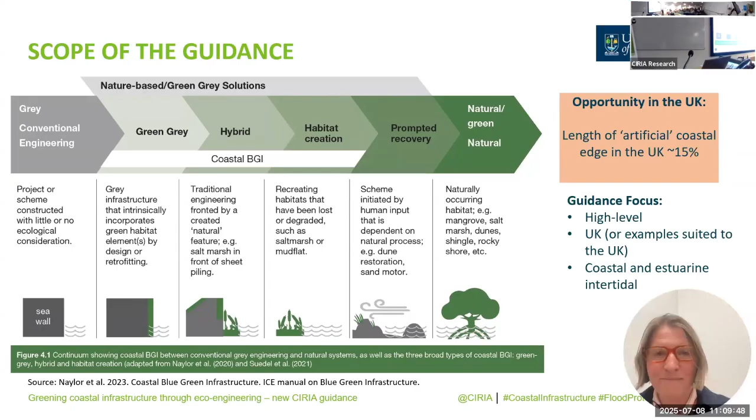Thank you very much, Larissa, for providing that and pre-recording it in time for the session. So I believe we're now going to hear from our next speaker, Joanne Herridge, who's an Assistant Project Manager at HR Wallingford and lead author of the guide, alongside Emma Hicks, the Principal Engineer at Haskoning, who are going to be giving us a deep dive into the guide and what you can expect to learn from it as well. So if I could invite Jo to the stage.

Yeah, so hi, I'm Jo Herridge from HR Wallingford, and myself and Emma are just going to take you through some of the main topics that are included in the guidance and just give you a bit of a flavour about what's included.

Okay, is there a microphone? There is. I can up the microphone max, so just... Okay. You might just have to speak into it. Yeah. Okay.

So just to introduce you to the project team, the author team is made up of HR Wallingford, we were the lead authors, and we're working with Haskoning and Hades, who authored some of the individual chapters. And we're also supported by independent consultants, Steve Challoner and Larissa Naylor, who you already met. And we had a project steering group that was co-chaired by Larissa and Brian Curtis, and it was made up of all these organisations that you see listed here. So thanks to everyone there who's involved in the reviews and comments throughout the process.

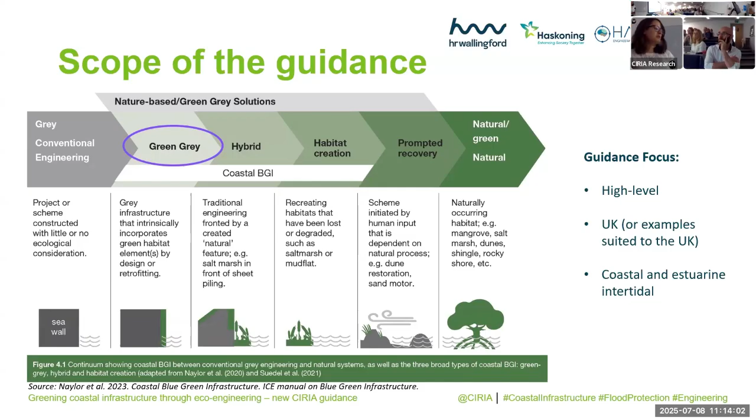So why is now a good time for the guidance? Well, over the last 10 years, there's been a rapid advancement in the science, policy and product development related to eco-engineering. So we have a growing body of academic and industry trials and evidence of applications and their success to build on. But at the moment, it's not particularly widespread in industry. It's led often by these enthusiastic and dedicated teams or individual champions. But it'd be nice to bring it to a more widespread application and seen as a viable first option rather than just a nice to have.

And there is lots of guidance out there already about nature-based solutions. But as we said before, green-grey is recommended in place of grey engineering solutions where other nature-based solutions are not suitable, and also where it's ecologically appropriate. So these are some of the main project goals. We wanted to build upon existing guidance documents, such as CIRIA and NERC's collaboration in 2017, and update the examples given there to really highlight the art of the possible when it comes to coastal eco-engineering. And to do that, we look at the evidence, the design and the application of the methods, and use that to provide recommendations of how these designs can be applied in typical UK coastal settings.

We also wanted to look at some of the asset factors, so things like the asset lifecycle, monitoring and maintenance, and also the business case, so looking at how to build an effective business case, and also looking at some of the costs and benefits and policy considerations there. And one of the key things we wanted to do was inspire the target audience. So that could be asset owners, engineers, coastal ecologists, or any other stakeholders involved in the design, construction and management of coastal infrastructure, and give them ideas about how eco-engineering could potentially be applied in their fields or in their projects.

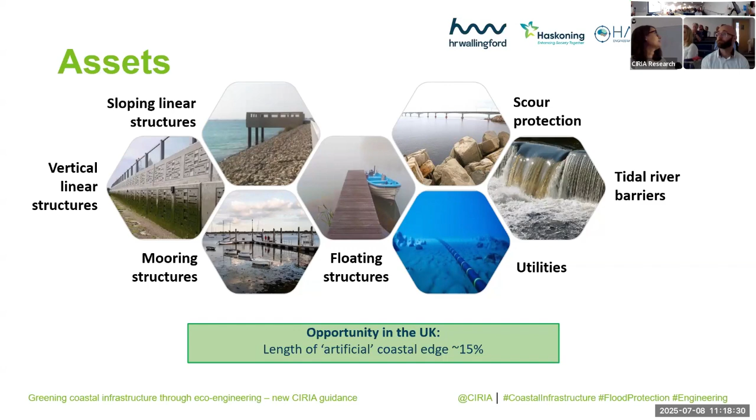And when thinking about the assets, you need to consider the asset lifecycle. So there's a simplified version of that shown here. And we see that you can include eco-engineering features really at any stage within that lifecycle, depending on the project. So if it's a new construction, you probably want to consider it during the early stages, during the scoping, planning and design phases. But there's also techniques that could be retrofitted onto structures.

And these could obviously be applied on existing structures, so it could occur anywhere in that lifecycle. And there's also opportunities within the regular repair and maintenance cycle of an asset. That could be an opportunity also to introduce eco-engineering. And throughout this, you need to consider the asset performance factors. Obviously, you want the eco-engineering features to perform from an ecological perspective, but also bearing in mind the intended engineering performance of the asset and make sure that's not affected.

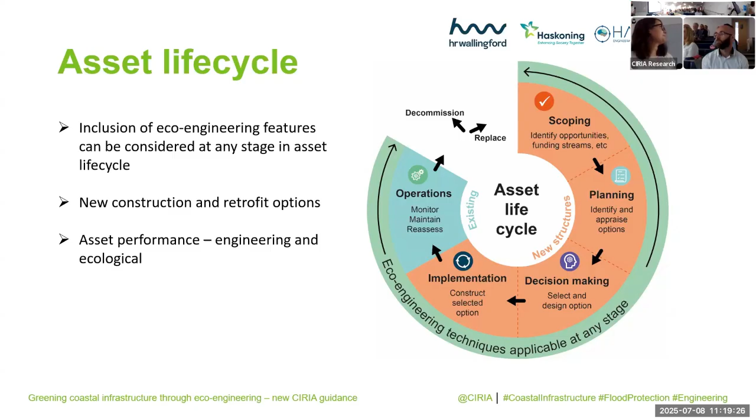So looking at the techniques themselves, we looked through all the different techniques that are available in the market, in the literature, and in the case study examples. And we found this idea of habitat complexity was really important, and it ran through them all. So habitat complexity being the diversity of structures, resources and niches that are present in an ecosystem. And you find that more complex habitats will typically support a greater species diversity and abundance. There's increased opportunities there for shelter of organisms and areas for colonization.

So if you think, for example, of a natural rocky shore habitat, it's going to have much higher habitat complexity than, say, a concrete seawall. So that's what you're doing with these techniques, trying to make it a bit more similar to those natural kind of habitats. So we looked at all the different techniques, and we divided them into these 5 main groups here, shown in the table.

So we've got textured surfaces, for example, the addition of textured blocks and tiles, or the creation of grooves, pits and ledges in the surface. Water retention structures, so that could be artificial rock pools or holes and cavities in the surface that retain water.

And swim-through habitats, mainly relevant in a subtidal context, so that's holes and crevices within a structure for organisms to live and hide in. Macro habitat features, so anything that is attached onto the structure to provide additional substrates, such as vegetated wall modules, ropes and twine.

And then finally, environmentally sensitive materials. So thinking about using ecologically sensitive and bioreceptive materials, and also avoiding toxic surface treatments. So there's a variety of different techniques you can use, and often in the project case studies we looked at, they would use probably several of these techniques.

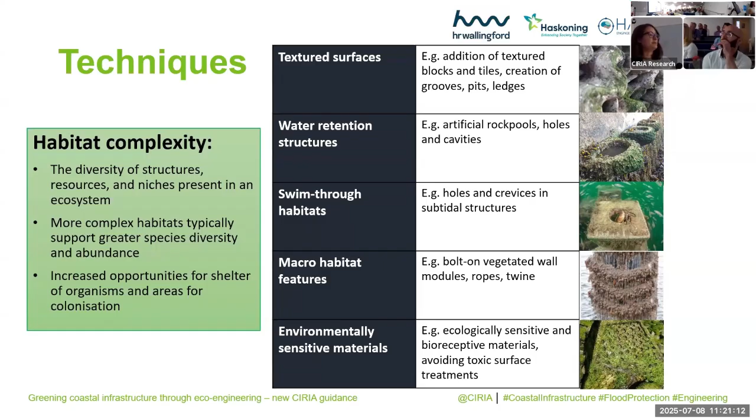Another thing we look at is the design considerations. So what do you need to think about when you're designing the eco-engineering techniques? For example, knowledge of local conditions, considering baseline ecological and geomorphological surveys, so you know what environments you're working with. You can also use that to measure performance against. Considering ecologically suitable and sustainable choices of materials.

Installation, so how do you actually fix or incorporate the eco-engineering features onto the structure, as well as timing can be important. If, for example, you're targeting a particular species, you might want to think about the different settlement periods for that species. Spatial distribution, referring to the arrangement, and also importantly, the positioning in the tidal range. So obviously different techniques are going to be applicable at different areas in the tidal range.

And maintenance and monitoring is an important one, looking at how do you go about monitoring the biodiversity impact of these eco-engineering features, and also how do you incorporate that into the regular asset inspection requirements, and maybe there's a need to adapt the methods there that you're using. Invasive species is kind of linked into that one, making sure you're monitoring and recording any invasive species to make sure you're avoiding any adverse impacts from that.

And then the last one, public engagement and safety. So a lot of these coastal structures are in public places, they're accessible. Beaches and seafronts are obviously widely used by the public. So there's an opportunity there for additional education and outreach activities, making sure you're including all the key stakeholders, as well as public safety considerations such as access and signage. So you might want to put up signage to inform people about what these eco-engineering features are doing.

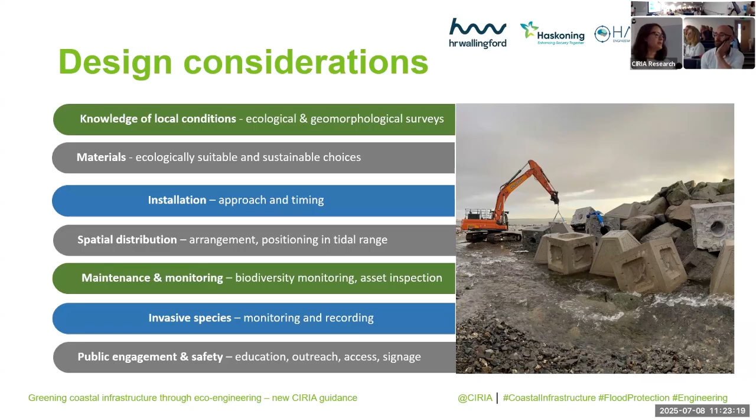So all of these considerations here are really just to make sure that you're designing eco-engineering solutions that are as successful as they can be, and that you're deriving all of the intended benefits from them, and also possibly some additional benefits as well. So yeah, talking of benefits, that leads nicely into the business case development. So Emma will take you through that.

Hi everyone, I'm Emma Hick from Haskoning, and I'm just going to take you through some of the business case side of the guidance. So business cases, they're the process through which a project should be developed in order to ensure a successful outcome. Regardless of the type of eco-engineering project, whether that's a standalone retrofit type project or part of a bigger project to construct new assets, it's important to understand how the specific requirements of the eco-engineering measures fit into the business case model.

So the UK government's preferred process for developing projects is the 5-case model. And this covers all aspects from understanding the need for the project through selecting the best option, how it's going to be procured, how it's going to be funded and delivered. So the new CIRIA guidance provides advice on each of those cases in terms of the things that need to be specifically considered for eco-engineering projects.

So for the strategic case, the guidance provides advice on how to build eco-engineering into the case for change and the project's objectives to really drive buy-in from key stakeholders and funding organisations right from the start of the project. This is really key to getting the eco-engineering embedded into the project rather than just an add-on.

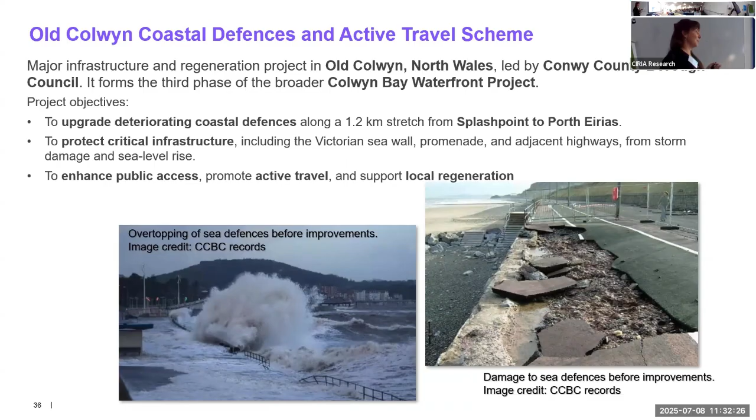Although it doesn't protect properties, it does actually have the North Wales Coast Railway line and the main road across North Wales directly behind it. So it was important to maintain this. So it was split into 2 areas. Area 2 has been constructed to date. Area 1 is actually still awaiting funding, so hopefully it's important to get that done. Mott MacDonald did the design, as I've already mentioned. Conwy County Borough Council was the client, and then it was funded by Welsh Government and constructed by Alun Griffiths.

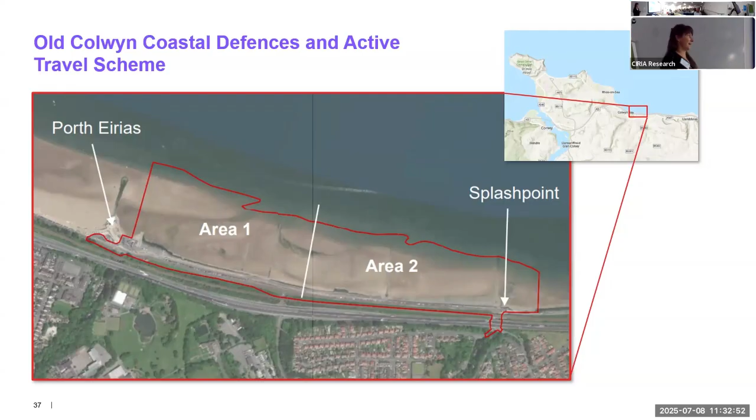So it involved the construction of a new rock revetment and then extensions to groynes and outfalls. Also raised the promenade to improve flood resilience, and then there were improvements to the cycle path and prom. There were also landscaping and public realm improvements, so we installed a fishing platform. There was access improvements, so there's 2 new access steps. There is an accessible ramp proposed for Area 1, and then there was numerous ecological enhancements which we'll cover soon, and then an outdoor classroom and picnic area which also forms part of Area 1.

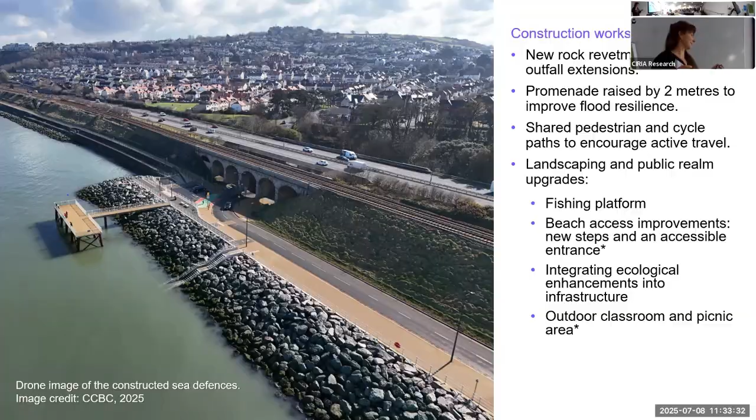So yeah, third iteration of this slide. Why eco-engineering? So traditional coastal defences are smooth, vertical, and subject to drying out. As you can see from this image, that was the original seawall before the rock armour was installed. So harsh and hostile environment with low biodiversity. So eco-engineering adds microhabitat, provides rougher surface textures and water retaining features, which means it's more colonisable surfaces and more biodiversity.

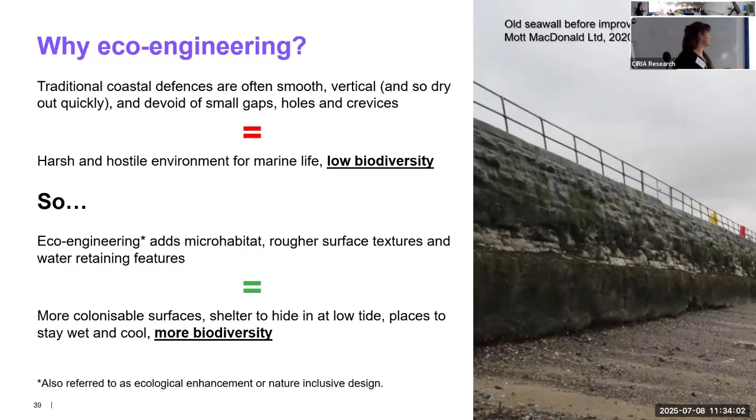So we had tide pool units integrated into the new revetment. So these were all positioned so that they were water retaining. We also had ecological armouring units. So we've got 2 existing rock groynes that go out, and we had 2 on each of these. So we positioned one so it was flat and the other one so it was angled, just to see kind of how they worked. And then we also had verticals. These were installed on the east side of the access steps because prevailing conditions at Old Colwyn is from the northwest, so sheltered side, and clustered in kind of 5 each one.

Also had enhancements to the new revetment that was installed. So we had drill holes, pits and striations to kind of enhance the rock that was there. On that actually, the rock armour we tried to source locally. So about 90% of the new rock armour was sourced from quarries local to North Wales, so within a 30-mile radius. And there were some rocks already there. They were regraded and reintegrated into the new revetment.

The fill raising the promenade as well, that was sourced from other construction sites that Alun Griffiths operated. So otherwise it would have gone to landfill, so used and recycled. We also have textured precast walls installed at the base of the kind of access steps. So they only got installed a year ago.

So results so far, there's an increase from 12 to 27 species on the eco-engineered units compared to the unenhanced sea defences. Despite being the smallest, the verticals showed the highest increase in species richness. Another one is blue mussels were noted to be present on the eastern ecological armouring unit. This is notable because historically there was a blue mussel bed mapped in the eastern end of the scheme, but when we did the pre-construction surveys, these weren't present. So it just shows that they're actually working and bringing them back.

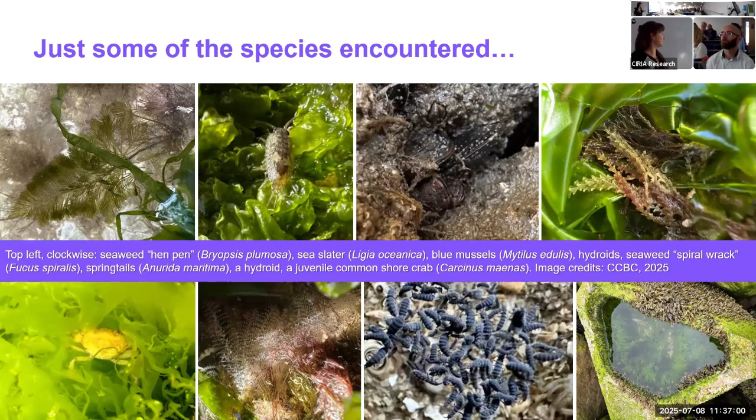And then springtails. They were in the upper shore in the kind of water retaining structures. And also juvenile common shore crabs and things. These were in the verticals on the seawalls. And some more. So varying forms of anemones. A rough periwinkle in the end there, and then it might be quite difficult to see actually. The shrimp is swimming towards the camera, so it's quite well camouflaged, as is the common goby, very well camouflaged amongst the sand, so you see its head on the right there.

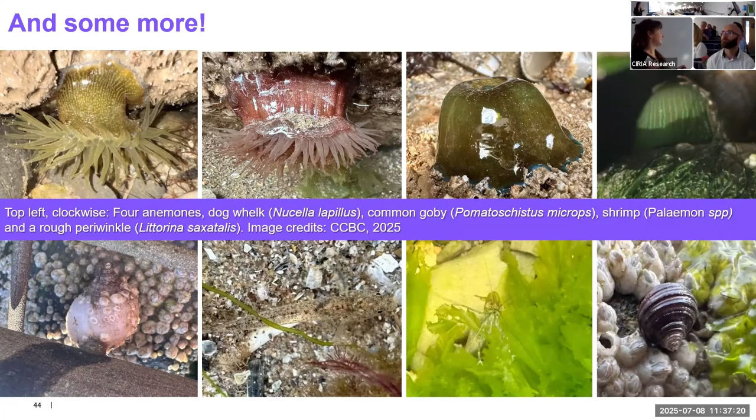So, what's next? We're going to continue monitoring monthly, so hopefully get us a total of sort of 2 years of ecological data. Also going to install an information board because actually we've done all of these really nice enhancements and nobody knows they exist.

Okay, challenges and lessons learned. So there were some challenges. The specification for the enhancements was an appendix to the main construction works. So going forward, we need more detail as to when and how to install these in relation to the wider construction scheme, not just what. So we're aware of what needs doing, but in terms of the timing of when to do it amongst the rest of the construction works.

So for example, the enhancements to the rock surface. They were very keen on placing the rock revetment before putting the enhancements on them. So it would be useful going forwards to have them say, right, these enhancements need to be put on the rocks before they're then placed in a revetment, for health and safety particularly.

Another one was changing attitudes and education. So the scheme provided the opportunity for upskilling of contractors, and having a positive attitude towards the enhancements enabled successful implementation of this. But yeah, educating on the benefits the ecological enhancements would provide was important, as there was initial reluctance to adapt the standard working methodology, particularly in challenging conditions.

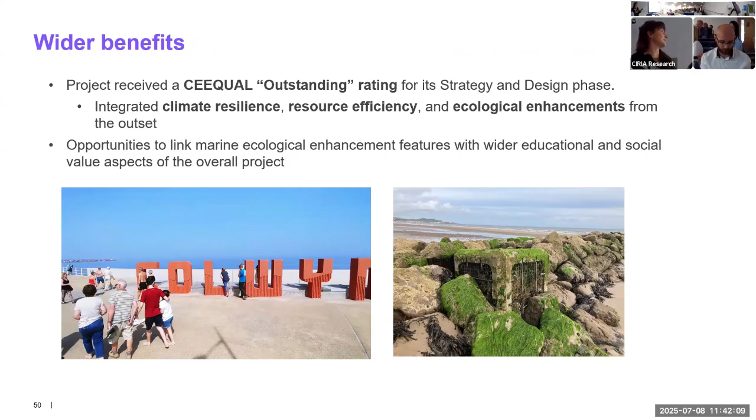And then to finish off, these are just some pictures of the Colwyn Bay waterfront as a whole. So the East End was predominantly aimed at improving the ecological benefits of the area. This end was also amenity value. So this is more to the west. So we've got showers, new play features, like a servicing station, and then seating and stuff.

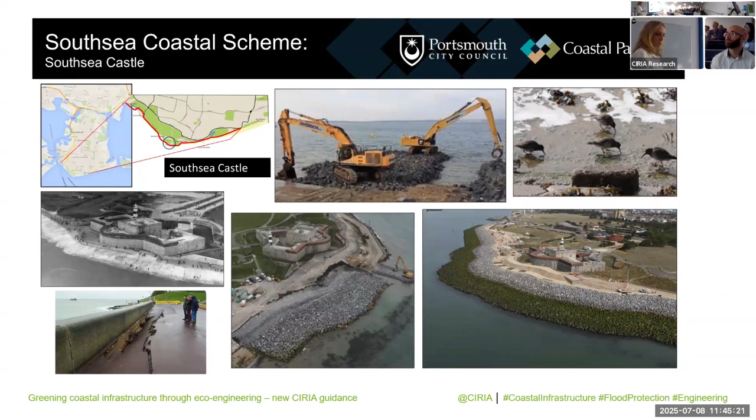We also put precast tide pools in. We had 45 tide pools put in, and we also trialed rock munching, which is my term for digging out pools within the larger rocks themselves. And we tried putting both the rock munched and the precast tide pools in one area to see if it made a difference to do the two, because they've got very different requirements putting them in.

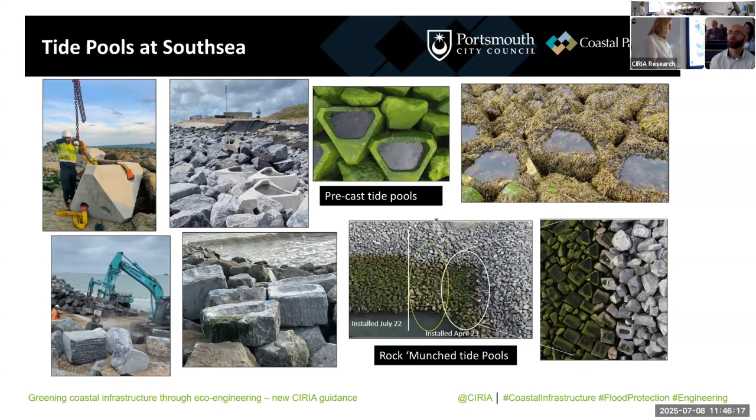And we had an independent survey done from Jess, who's here today, and that was last summer, 2024. It was an independent survey, and it concluded that the combination of enhancement techniques has resulted in a diverse community and it is highly recommended that these techniques should be used in future schemes. So that was really good.

But we'll go and see that one later on. The main one that I wanted to talk to you about was the North Portsea Coastal Scheme. It's 8.4 kilometres of defence. It's a 10-year build and £87 million, and it's increasing the standard of protection. But the main area I'm going to talk about is a little bit in purple there.

So we did it in phased construction, and in this area here, we really wanted to look at different alternative ways of working. So I'm really going to focus on explaining about the eco-formliner and the high tide wader roost island, just to give you an example of two different ways that you can really do eco-engineering. But we've also done lots of other things. There's always a solution, so you can do lots of things.

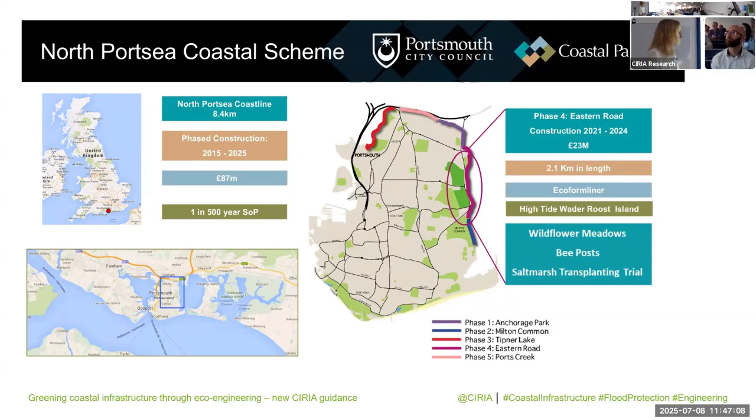So I started with the eco-formliner. We wanted to do something different. One of the previous phases was a very smooth seawall, and we could see that it was not really enhancing the environment. The coast was very heavily designated, and behind we had a lot of infrastructure. So we had to do a vertical wall. That was our only option. And we started to look if there was something on the market to cover the whole height of the wall, and it's 3 meters high in places. There was nothing that we could cover the wall with to create some kind of enhancement.

So we looked at research and found Larissa and her work at Glasgow University, and based it all on her PhD research with Mari up at Glasgow, and particularly this study here in the Singapore tile, which is the one with lots of holes in. And we basically based the formliner on that and developed it. And then we spoke to formliner companies. So it's actually creating texture on the wall itself rather than attaching anything to the wall.

But we needed to check that the formliner itself could withstand this. Usually they're vertical things, so when you release it, it's easy. This was texturing horizontally to try and hold just small amounts of water in the wall. So we tried that. We did a small mold, and that worked. It's striking out, and that's the texture on just this small little block to see if it would work.

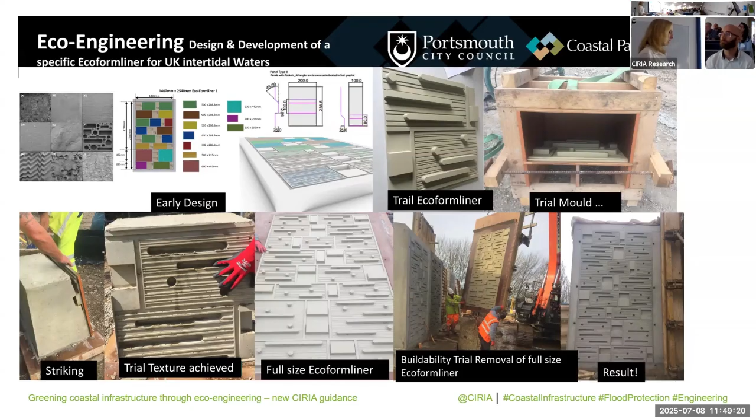That was just in the car park, because the construction is actually within the intertidal, and we needed to make sure that it wasn't going to slow up progress, because of the very tight timescale for doing the works. We started in 2021 and carried on till 2024. We could only work in the summer months because of the overwintering bird period. So we had a lot of turnover of staff in that time. So we did a lot of toolbox talks and videos to show how to do the prep of the formliner to make sure we got the consistency high.

This is a smaller mold at the top there, and we created it so that it could be cut into different sections to facilitate the different design of the wall as it goes along. So some areas have this kind of shoulder, and other areas in the bottom corner it's the full height. And the mold is reused many times, so it's very cost effective. The contractors liked it because it didn't slow down production. There is a bit of prep work, but that can be done inland. It's not a critical path, so it doesn't slow down the production.

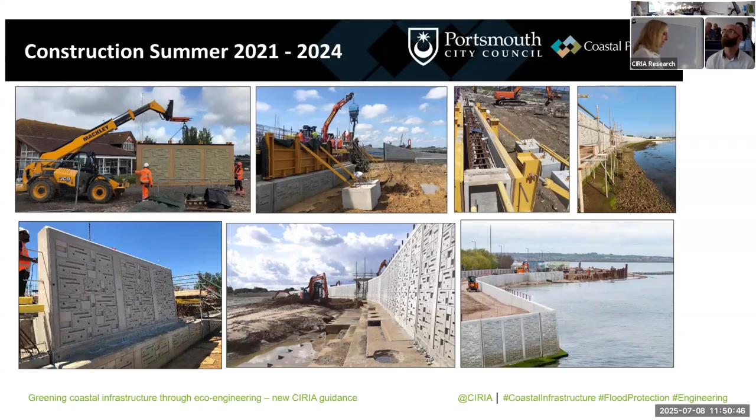And the contractors on site actually took ownership of it. Before they knew who I was, I used to go out on site and check what was going on, and they'd start telling me, do you know what we're doing? We're building this to create habitat. And it was really great because then I knew that they were taking ownership of it, and they were really proud of what they were doing, and it really made a difference to the whole feel on site, which was great.

So the colonization: initially we got the small hydrobia, I think they're not called that anymore, marine snails. And then we got the ulva moving in, which is a colonizing seaweed, but we've got really high nutrient levels in the Solent and particularly in Langstone Harbour.

So that's quite dominant along there. We started to see the difference in areas between the smooth and the textured surface, and that's kind of moving along. So where it's lower in the tidal frame, we've got this kind of growth of ulva going on. And now recently we've just got the fucoids, the brown seaweeds, coming in. This is the target seaweed that we wanted to grow.

Obviously we have constructed a defence. It's going to impact the foreshore, so it's taking a little while for it to colonize. We had to work on the foreshore in areas because we couldn't work from behind. We did limit that. We've got the nutrient levels, and also I need to be patient. It's taking time for it to grow.

The design itself, as I said, was based on this PhD research. So we created different niches for different species. So the seaweeds can grow on areas where the grazers, like the limpets, can't graze them, so they won't eat them off the wall.

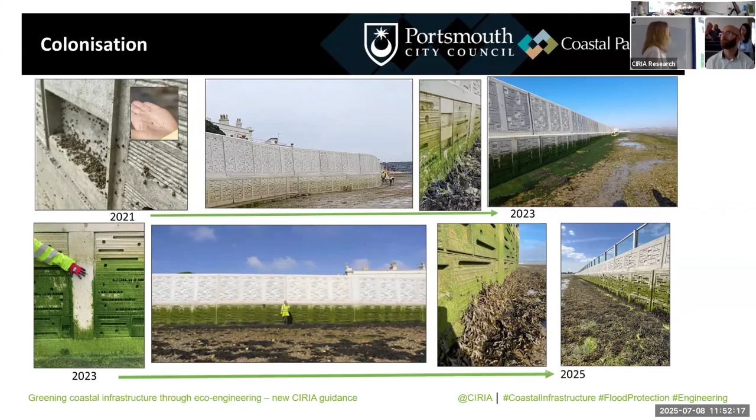It's quite complex. So you can see here the difference between the texture and the smooth, as the texture is really starting to show at all levels of the tidal frame. Obviously lower in the tidal frame it is easier to grow. It's starting to show that it's really working. So texture is definitely the key.

Also, what we really want to see is the kind of asset resilience. So once you get the seaweeds growing on the wall, underneath, it keeps it moist and it keeps the temperature consistent. So this really shows how it makes the wall last longer. It absorbs the wave energy and it stops this constant drying of the wall, wetting of the wall, which reduces the asset resilience. So it should increase the asset resilience. And we are doing more studies on that.

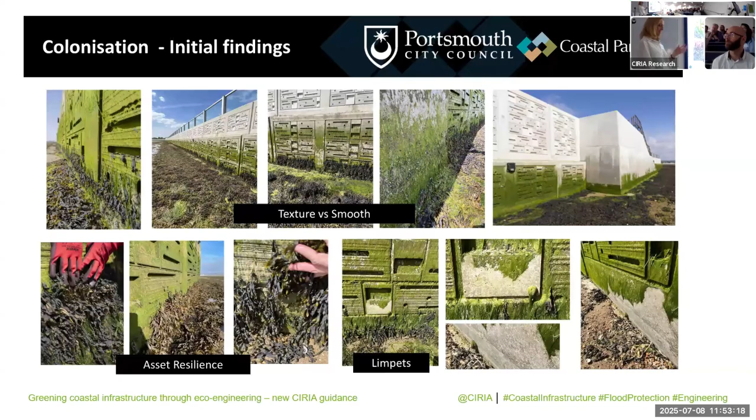The limpets have now moved in, and they're cleaning the areas that are smooth, which is what we designed them for, but they don't seem to be eating on the other areas, which is great because that's also what we designed it for. Another intervention that we did was a high tide wader roost island.

This area is an SPA, designated for overwintering birds, so we couldn't work in the winter. The limiting factor on the population is that these birds have got nowhere in the winter to roost. We've got such high levels of population that when the tide's in, they've got nowhere to go inland, and they get really disturbed by dogs and people on fields or anywhere where they're trying to go.

So we initially tried to look at just utilising the foundation of the wall, but actually Natural England said, could you make it bigger and move it out into the harbour, which had additional issues on the construction, but it worked well. So initially we had the wall in place and we built the island, as you can kind of see the various processes going through.

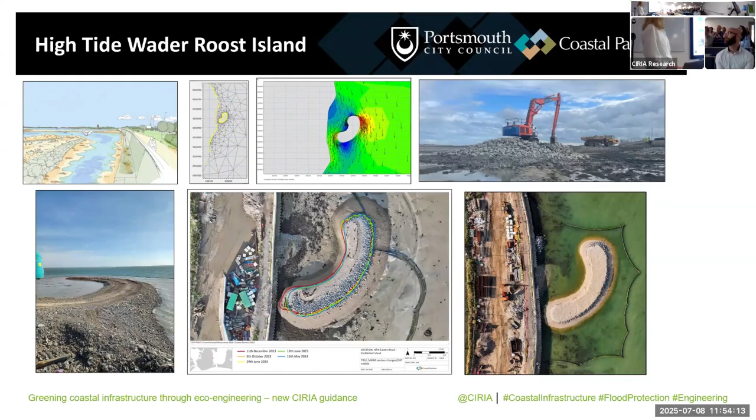And then in this photo here in the bottom, you can see where the wall was, and then we moved it to the inland bit, so it effectively moved the island offshore more. And the birds are starting to use it. They usually take a while. They're quite nervous of using new structures, but they are using it, which is great.

And linking into what we were saying earlier about trying to get the people involved, we're putting interpretation out. We're trying to make it a bit more inclusive and interactive. So we've got Braille going onto the interpretation, and also QR codes, so people can hopefully stop and listen to the sounds of the birds. They're quite far out now and they're really tiny, so they're very hard to see. So we're trying to get people to listen for the birds and understand, as a focal point, how they can be a bit more responsible.

So, you know, there's always all aspects of it. And I just wanted to try and give you a flavour of what we've done. We've done lots of other things on schemes, but you know, on every scheme there's always a solution. I don't think we can ever say, no, we can't do anything. There's always something that we can do. So I hope we've given you a bit of a flavour of that.

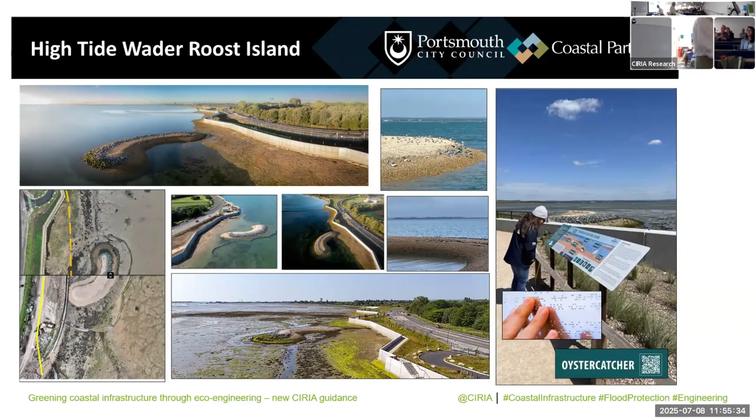Thank you so much, Lucy. So we're now going to hear from our final speaker, Nikolai Rotterman, who's a Senior Teaching Fellow at the University of Portsmouth, who's going to be looking at lead planning and monitoring at the North Portsea Coastal Scheme. So, over to you.

Great. Hi, everyone. Can you hear me at the back? I know the aircon has kicked in again and we can't seem to find someone to switch it off, so apologies for that.

How this all started is there was an opportunity for us to work with coastal partners to do some monitoring on this exciting new construction, the North Portsea Island scheme. And I should say right now, apologies from my colleague, Fran Cabada-Blanco, who's co-run the Portsmouth side of this. She's sadly out on a field trip with students in Bali right now, so she's really gutted she can't be here today.

But what we wanted to do on the Portsmouth side was integrate the monitoring of the seawall into our annual student projects. And that way we can really start to develop a long-term data set to monitor the changes for a scheme that's really designed to be built with a 100-year life cycle. The scheme is designed taking into account that sea level will potentially rise quite substantially. And what I want to do is just give you a run through of some of the monitoring that we are doing, some very initial data, and then talk about where we're taking things forward from here.

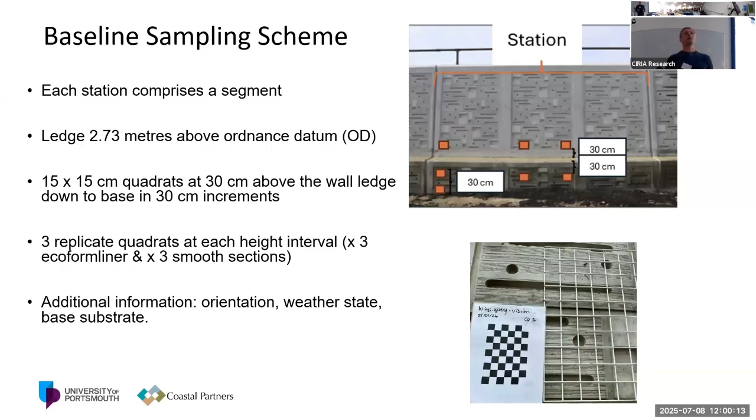So we're taking quadrats along the textured surfaces, and then we're also doing quadrats on the smooth sections as well. Trying to get lots of small quadrats, and the horizontal positioning of these quadrats is randomly chosen. So we're trying to get lots of replication, and a methodology that's really nice and consistent so that every year our new batch of undergraduate students as well as master students can learn the skills really quickly and get data that is comparable year on year. That's the priority for us, getting a robust data set over time.

So intuitively, and again from the previous presentation, you can see that there are differences between the textured sections and the smooth sections. And this is a bit of the second section, the 2022 build rather than the 2021 build of phase 4. And one of the big things we've noticed is that the first colonization is this green algal mat, which is a combination of several genera of green algae. You'll go out today, you're going to see the mudflats completely covered in these algal mats.

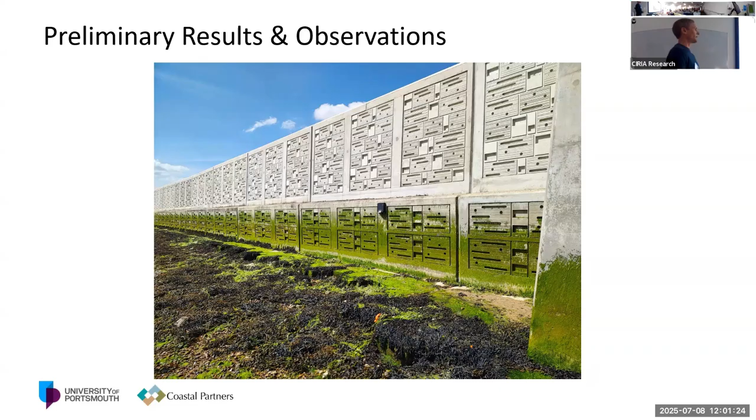And this is really a function of the large nutrient input into Langstone Harbour, and that's a challenge that we have to deal with. We don't really know at this stage how that impacts the growth of the fucoid algae, which is really the target species that we want growing on these seawalls. So we don't know if it's really impeding. We are looking into that. I just wanted to show you a couple of plots, an output from one of my undergraduate students last year, comparing textured versus smooth sections of the seawall.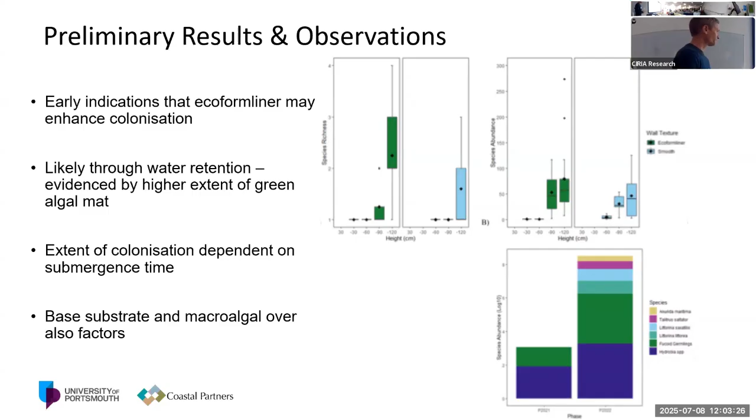So these smooth sections aren't intentional. They're just a byproduct of the constraints of that design process, but it was an opportunity for us to therefore compare smooth versus textured in the same location with the same orientation.

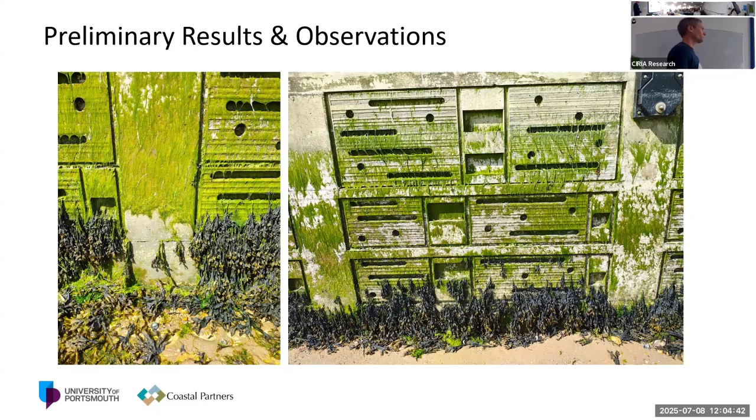So what are we looking at now? And this is something that's primarily being driven by Fran, who's not here today, but we are looking at ways of enhancing, and that involves temporarily affixing fucoids attached to pebbles that are then epoxied onto parts of the seawall, and then comparing that with areas where the green algae have been completely removed, totally sterile areas, areas where we've just put the shingle pebbles without the fucoids attached as well for controls, doing lots of replication.

And things that we're noticing obviously is that one of the most important things is the height in relation to the seawall ledge is critical for that fucoid algae. If it's a bit too high, it just dries out and you don't really get anything happening there. So this is very early days. We've only just had one season of data collection. And so Fran's students are currently working up that data right now. So hopefully we'll start to see some differences. But you know, everything is looking quite encouraging at this point.

So yeah, conclusions. We do seem to see some enhancement of the algal colonization. I think this is primarily due to water retention, and any ways that we can enhance water retention is going to be a good thing. But also some of that complexity is potentially allowing fucoid algae to colonize. But we do think that connectivity is really, really important. That connectivity with the foreshore is quite critical. And then obviously height above chart datum.